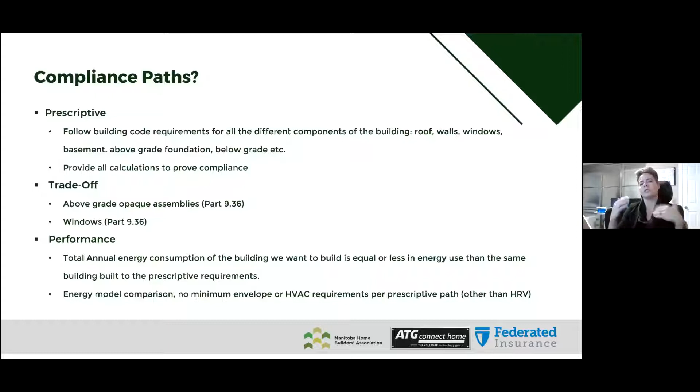What I mean by that is with your proposed house, you could get away in meeting code with building really old insulation values, an R28 attic, R12 walls, and R8 basement. Yeah, in theory, you might just be able to meet code. I'm not saying it's going to sell though, simply because that's not what mainstream builders would do, but it just shows that there's a lot of value engineering that can go into a performance model. So generally speaking, these are the two paths that are most used in code compliance.

So the prescriptive is an all or nothing. You can't do just the attic and the basement, you have to do everything. So all your windows have to comply, your walls have to comply, and then all your HVAC efficiencies have to comply. So it's an all or nothing.

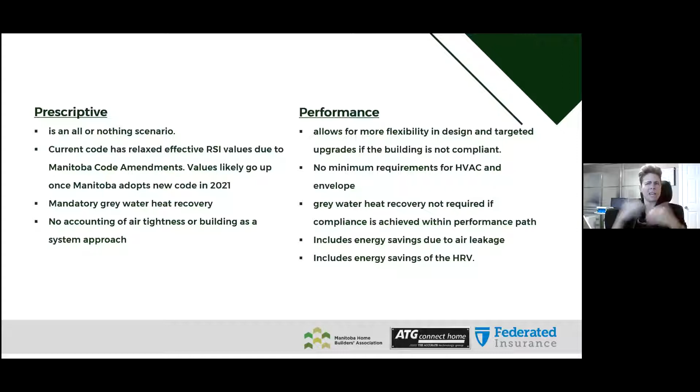The current code in Manitoba has relaxed effective RSI values because of the amendments that were made, but we kind of have to assume that those values will change and more than likely go up as Manitoba adopts the 2021 National Building Code, National Energy Code. Manitoba also requires gray water heat recovery for all prescriptive paths. And as I said earlier, there's no accounting of air tightness or building as a system approach in the prescriptive path.

Now, the performance path, it allows for a lot of flexibility in the design. There is no minimum requirements for HVAC and envelope, again, what market will pay for. Gray water heat recovery is not required in the performance modeling. And we can include energy savings from air tightness and HRVs. So I feel that there's not one size fits all.

You want to be able to play around with both, but really in our experience, what we've seen is the prescriptive path really benefits high performance houses. So when you're going to a passive house or net zero or highly insulated houses, then the prescriptive path is kind of a no-brainer to comply with code. It's easy, it's quick. But if cost is a concern, or, you know, most people want to build houses cost optimized, right? So performance tends to allow us to go in that direction.

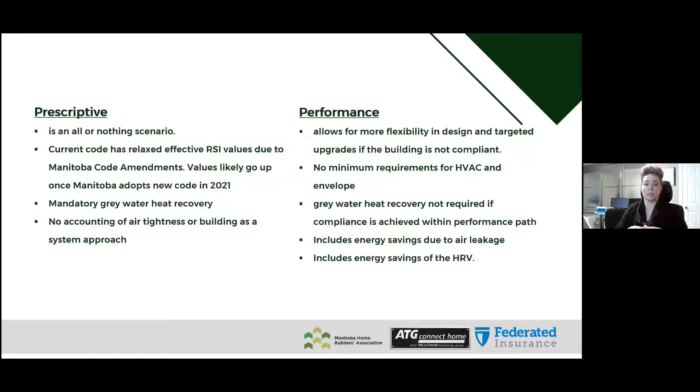Now, making energy conservation part of our building codes is always a good way to push an industry forward. I mean, let's face it, we've been building houses for over a century now. And as far as I'm concerned, we didn't change much. We're still building with wood, we're still building with batt, maybe the attic insulation changed, but we haven't changed really dramatically the way we do things for over a century. And now we're stuck with a challenge that is very, very time aggressive for an industry like ours.

So when we push an industry forward, we have to do it wisely. And we have to integrate the different parts of the codes and not just add them to one another. The reason for that, I'll explain in a minute. So if we don't carefully integrate all the different requirements of the energy codes, we may create more problems than good out of all this.

The building code is currently set in silos. So you have the ventilation piece, you have the thermal piece, you have the structural piece, and all these different parts of the building code don't refer to one another. They're all in silos. And so if we keep on that track and we don't understand how all these sections interact with one another, we may not be able to build houses in our current developments. We might have structural problems. We might have indoor air quality issues and mold growth in our brand new houses and major envelope failures.

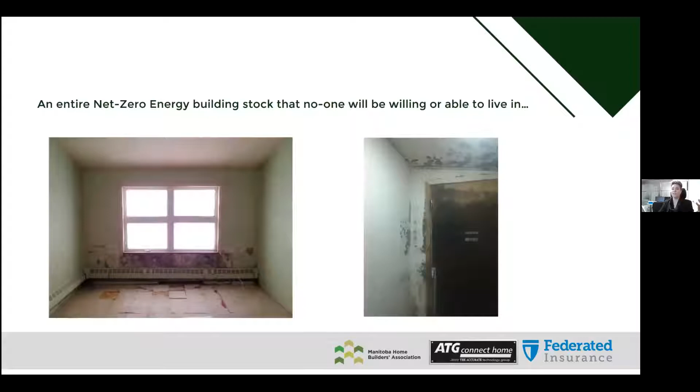So this is what we might end up doing if we don't take this carefully. So adding insulation and only doing that is not a safe way to approach the transition to 2030. If we want to build to 2030 net zero energy ready, we want to make sure that people are going to want to be living in them, and that they will be able to live in them.

And the reason why I separate the two is that, when you look at pictures like these with mold and drywall falling off the walls, I mean, some people that have very, very low income, that might be the only thing they can afford, but ultimately their health is going to kick them out of there. So where do we find that balance?

So how do we make the transition to the Pan-Canadian framework targets of net zero energy ready by 2030 a success? There's a lot of moving parts, and just like any new trade or new expert that comes in construction, that's where performance modeling at the design stage comes in. Currently, the performance path is mainly used as a verification tool to make sure that the houses comply with the different building codes.

When we take this approach to the commercial level, the last code change from 2015 to 2017, I think many larger buildings that were compliant by about 5% in the old version are not compliant anymore. And so now they have to treat the performance modeling as a design tool, and that leads every decision they make. You have to know that when you go to tender, your building will be compliant. Now that hasn't happened yet in residential, but we have to assume that it's coming. So performance modeling at the design stage will become a key component to making this work.

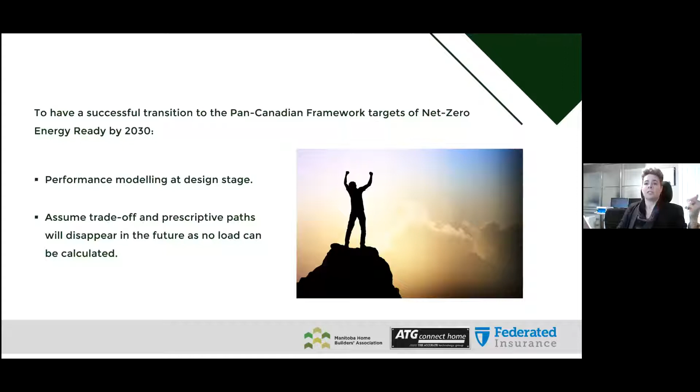The other thing too is because we can't calculate a load, so an energy load, heating, cooling, appliances, electrical load, on a trade-off path or prescriptive path, we have to assume that in the future, those paths will disappear simply because of the target from the Pan-Canadian framework. So how do we get to transition without all the risks? The risks of envelope failure, the risk to occupant comfort and callbacks, and how do we do it more cost effectively?

So here's a nugget I always like to point out. Many homeowners call back builders after occupancy for whatever reason. What I think we're missing here is that most of these callbacks are triggered by some kind of discomfort. Now, homeowners don't know that it's a discomfort issue. All they see is the symptom. Symptom could be, there's cold air coming out of my ductwork. I have ice on my windows. You know, whatever the discomfort is, whether it's visual or thermal or a breeze.

And so they don't know that it's a discomfort trigger, but you get the phone call and now you're trying to troubleshoot something that is very subjective; not everybody feels comfort the same way. So I feel that there's a conversation around comfort. We see it as something that is kind of secondary. But when you really think back at all the calls that you might get after occupancy, you might realize that if we designed for slightly better comfort for the occupants, there's going to be a lot less callbacks. So there's food for thought.

And cost is always a conversation piece. I mean, let's face it, we all want to build a good product. We all want to get to net zero energy ready by 2030, but nobody's in business to go under. We need to make this work for all. We need to make it cost effective. So this is where air tightness and energy modeling becomes your best friend. Now we want to include those two pieces together, for all the reasons that are listed above.

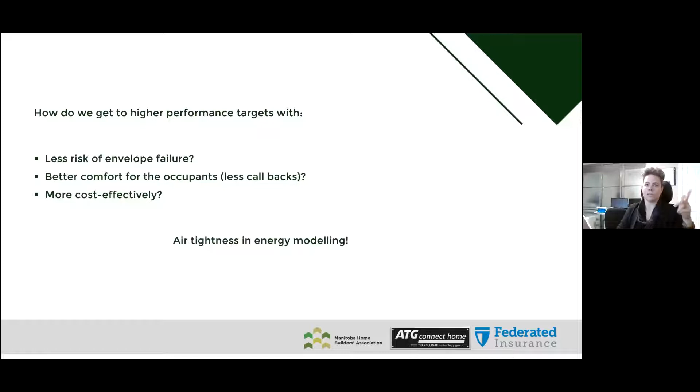So in Manitoba, it's easy because I have been made aware that the builders in Manitoba are already experts at air tightness due to the push of the R-2000 program in your region about 10 years ago.

So kudos, because that's not what we see in Alberta and in BC, okay? Now, just to be fair, the different climates allow for different leniencies, different relaxations. But there's something to be proud of as far as the Manitoban builders in how you can detail the air tightness of your houses. So if you're putting in all this hard work, why not use it to your advantage?

So let's do a quick airtightness recap. As this is more of a monologue, usually this is done and we're kind of interacting all together. I welcome you to just kind of think about the questions I'll be asking, and then we can have a conversation around them at the end of the session.

So really, what's the intention of an air barrier? What is your primary air barrier? There's a few mainstream ones, but it's all up in the air, and you can get really creative. What materials can we use and how do we use them? What are the challenges around air tightness? What are the benefits? Because it's not all just about energy efficiency. There's a lot of other benefits to air tightness. How do we detail it?

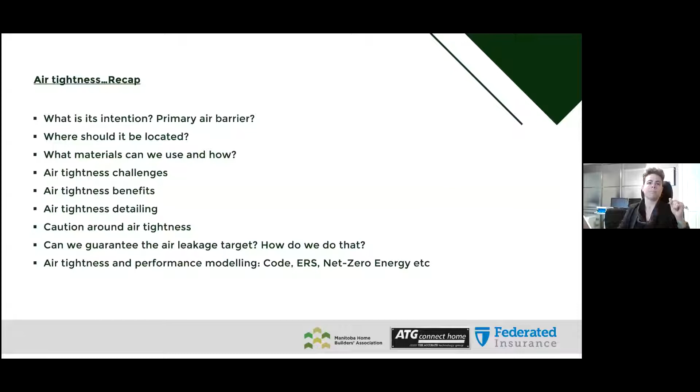So what's the intention of the air barrier system? Well, you probably all know this, but basically it's to reduce the amount of unwanted or uncontrolled leaks through the envelope system of your house. And those leaks are mainly triggered by pressure differentials between inside and outside the house.

So in the prairies, and that's really theoretical, the only time that we would not get any air transfer from inside the house to the outside is if there's zero wind outside and zero wind inside. So if we think about that, it really never happens. So might as well get on the bandwagon and understand how all this works.

So basically, there's three main ways that your house loses air: stack effect, mechanical flue effect, and the window effect. Depending on where your windows are located and when you open them, you can get either cross ventilation, or if they're closed, positive and negative pressure planes. So this is all part of building science 101. I believe there's a lot of courses out there that you can use if MHBA doesn't already have one. I know they have a huge amount of courses that you can tap into.

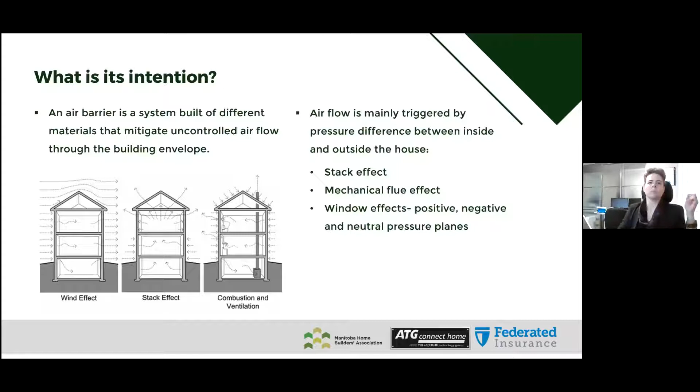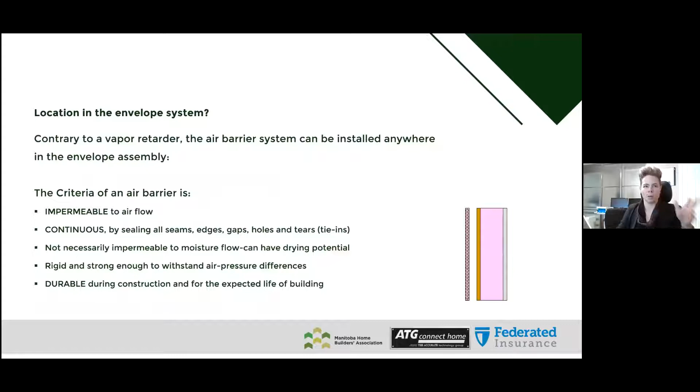Okay, so where does the air barrier system have to be located? Now we're talking air here. We're not talking about vapor retarders or vapor barriers. We're talking about air barriers. So again, air barriers can be located anywhere in your envelope system. It can go in and out. It can go only inside, or only outside, as long as it's one continuous tied-in system. I always like to say that you can't have a half-popped bubble. Either it's whole or it's popped.

So if you have an exterior air barrier, you have to tie it to the inside one at the ceiling level, and then tie that to your windows, down the wall, rim joist, foundation, back down to the slab edge, and then all the penetrations throughout that envelope system.

So the only criteria that we have to be aware of for an air barrier is that it has to be impermeable to airflow. I'll give you an idea what that means in a minute. It has to be continuous, meaning it has to be sealed, caulked, and taped so that it doesn't move and it resists air. You can't have a hole in it. It doesn't have to be vapor tight. It can be airtight, but it doesn't have to be vapor tight.

And that's where some people get confused. And the other thing is it has to be durable during the construction process, because it's great if you put all that detailing in, and then once you're done and all your trades leave, your air barrier is destroyed because it's a construction site.

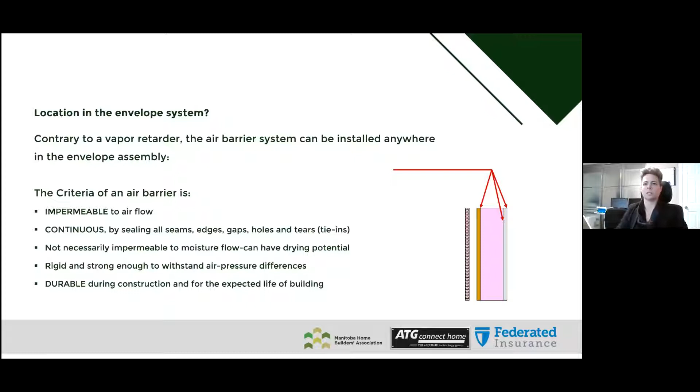So we have to be mindful of those things just to make sure that you're not just wasting your time and money. So what materials can we use? In my nerd world, it's any material that has 0.02 metric perms at 75 pascals of pressure differential. So that's a mouthful. In layman's terms, it's pretty much any material that's not fiberish, right?

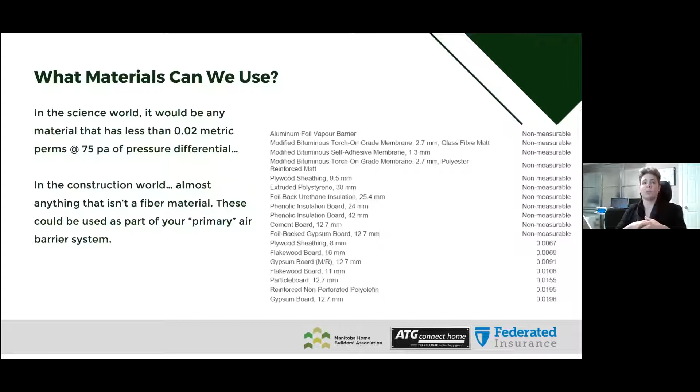So, generally speaking, or grossly speaking, you could just think about this material and hold it up to your face and blow air through it. And if air doesn't go through it, it might be an air barrier. You could use it in an air barrier. So there's a lot of products out there that we can use as an air barrier system. And on the slide, for the ones that can see it, there's a whole list of them. OSB, drywall, poly, polystyrene, anything that's hard really can be part of an airtight system. That would be the primary air barrier.

So what is your primary air barrier system? That is the one or two materials that will cover the greater area of all your components. So in Alberta, a lot of the time it's the polyethylene on the inside of the house. That polyethylene covers the attic, it covers the walls. There's another approach for the rim joist most times. And then the poly can go on the hot side of the frost wall in the basement, and then ties into the slab and even under the slab, right? So the polyethylene in that scenario is the primary air barrier.

Now, to make it airtight, you have to seal it all up, right? So you want to seal it up with whatever you can. So what are the challenges of building an air barrier system? Well, it's not something that's taught in school. I have an architectural tech background, and okay, maybe I date from 2001, maybe the curriculum's changed. I knew where to put detailing for vapor barriers, but I don't recall really getting a full course on air leakage and how that works.

There's a lot of management on site. Air barrier systems are a real team effort, right from the concrete foundation guys to the structure, to the framers and the insulators and drywallers, and then even the finishings. It can be pretty labor intensive, and it can take a lot of time. Not many understand it. They just do what they've been doing for years, and they don't really question if there's a reason for doing things a certain way.

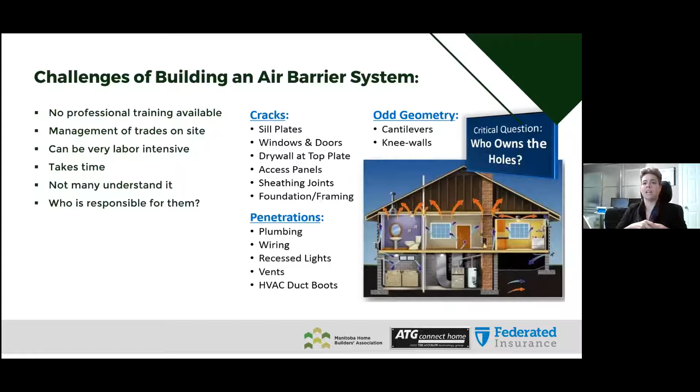And who's responsible for them? We have one of our customers here who's the drywall and insulator guy, and in his contract, he has the airtightness or air barrier liability. That's a huge liability. So that builder actually just rules out all the other trades and puts the entire onus of airtightness on this one trade. So again, to me, that just shows that there's a misunderstanding of how it is a team effort. So there's a lot of little holes in our houses that need to be addressed, and they're not always as easy to detail as we would like them to be.

So what are the benefits of building a performing air barrier? And we'll get into what that means. So for the homeowner and client, we can see operations cost reduction in the lifetime of the building. Now, to be fair, right now the cost analysis for energy savings is not very good because the cost of energy is so low. We can only assume that it's going to go up though. So as soon as you get a homeowner that plans on being in their house for 5 years, there's a chance that energy pricing is going to go up, so the cost benefit of airtightness is going to be a little better.

It allows for better control of indoor air quality and can also promote better indoor air quality. And that's where some groups get confused, like, well, if I'm too airtight, am I not reducing the indoor air quality? Well, again, we'll get into that in a minute. The houses are usually quieter. We don't hear as much of what's going on with our neighbors. I find it really interesting. As I did my master's in Europe, there's this stigma that says, oh, I don't want to live in a row house, or I don't want to live in an apartment because I don't want to hear my neighbors.

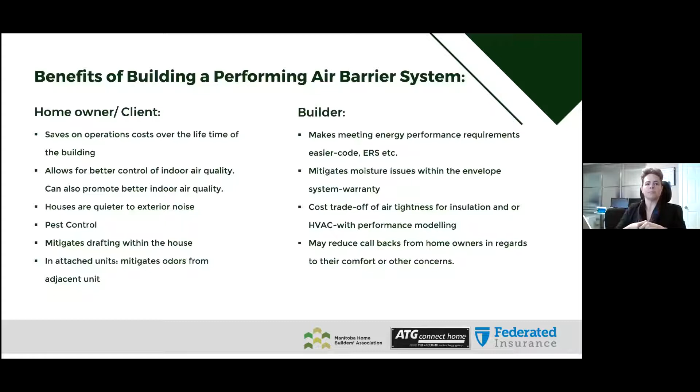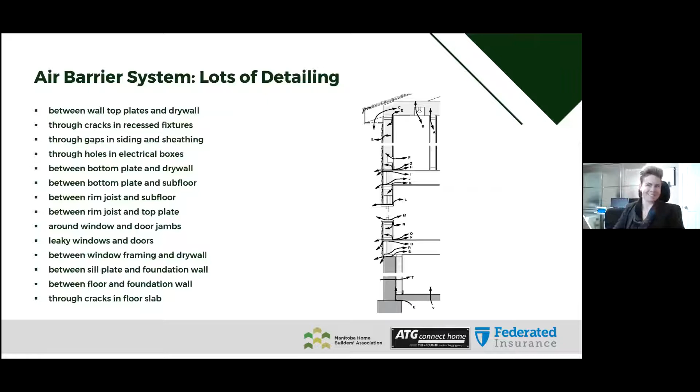So yes, when you have an airtight building, your unit will tend to keep a lot more of its moisture because now the moisture doesn't have anywhere to go. For the longest time, it could just travel through the walls and all the holes in your envelope system, and you'd be just fine, right?

So it could also create a challenge in indoor air quality, simply because some moisture is good, but just like anything, too much is like not enough. So you don't want to have it too high. And if you can't keep the relative humidity in check, then that's when you get condensation on windows and potential mold growth on either a thermal bridge on your walls or at the floor perimeter. We've seen that in the past.

So the typical response is, well, if I'm so airtight, how is my house going to breathe? Well, I'd like us to change the lingo a little bit. The house doesn't have to breathe, quote unquote, it has to dry. So the way I see a house is it really is a lot like a human body. Now, I agree, if we all wrap ourselves up in saran wrap, we're not going to be happy, right? We're all going to be a little suffocating. Now, if I poke a hole and I put a straw in your nose and mouth, you'll feel a little better, but it's not optimal, right?

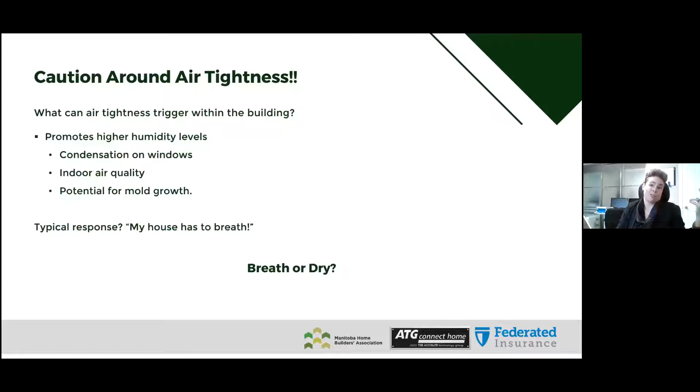So luckily, every single house has a ventilation system to dry it. And they're called windows. Now you're going to say, oh, come on, Em, windows, really? I'm like, well, it's not energy efficient. It's really uncomfortable. You can't control the amount of air that you're going to let through your house. But ultimately, if you're ready to suck up the consequences, you can open up your windows in winter conditions, and you're going to dry your house. Now, it's not optimal. So what would we recommend? Obviously, you all know it. An HRV is the best way to approach this.

Now, again, Manitoba makes heat recovery ventilators mandatory in every construction. Well, that's really good. And I don't know if you ever ask yourself, so why? But basically, because the Manitoban builders are already very well versed on air tightness and they reach really good targets, you have to have proper ventilation. And that is also why the different governments were able to relax the prescriptive values in Manitoba, because they know that the builders do a good job of air tightness. So again, kudos to you.

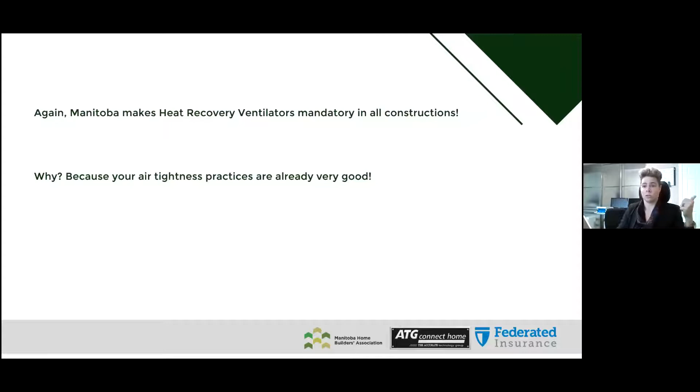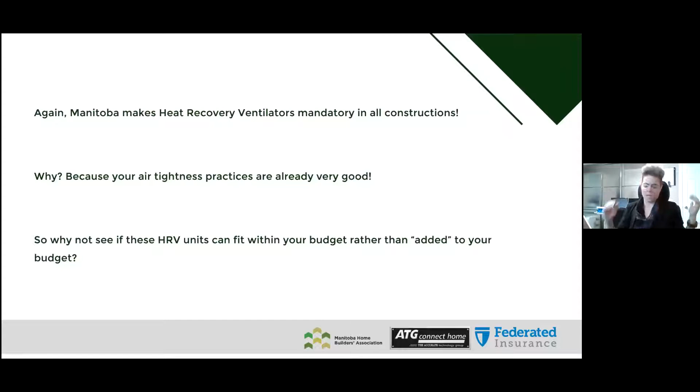Now, those HRV units, yes, we need them and we should be putting them in. An HRV could be anywhere from what, $700 to $1,500? I don't know. Depends on your market, depends on your unit. But is there a way that we could fit the price of that unit in your current budget rather than adding it to your budget? Now, I understand that you probably plan for the expense on your build, but can we make up that money in our pocket? And then you get to choose what you want to do with that extra money, right? I'll leave that up to your business savvy people on your teams.

So, ventilation systems and heat recoveries. As HRV recovers the heat from the exhaust air rather than discard it, it saves energy as it preheats incoming fresh air. Now that's a true statement, it does. But again, because of the way the building code is written, if you do a prescriptive path, you're going to get a little bit more benefit as far as theoretical code compliance than if you're doing a performance. But in the performance path, the reason why we like the HRV is not so much to save the energy, simply because of the ventilation rates we have to use, but mainly for the health and well-being of the occupants.

The HRV allows for some energy savings and code compliance because the reference house does not account for one. So if you put one in your proposed house, then that's a credit that you have over your reference house. But to get the full benefits of the HRV, the install should include a controller. And I know it might sound really odd, like, come on, really? People don't put controllers? Well, no, not everybody does.

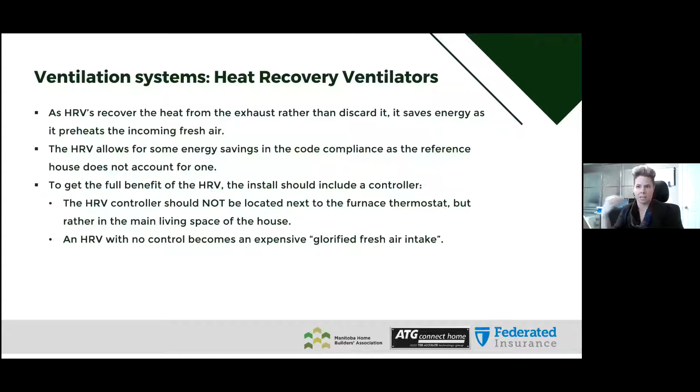So what we've seen here is people get bothered by that and they go downstairs and they unplug the darn thing. They unplug the HRV because the air coming out of the ducts is cold. And then the builder gets a call and says, I got cold air coming in through my ductwork, I don't want that thing working, blah, blah, blah. And so now we get into an airtight building that doesn't have proper ventilation, and then you get all the snowball effect of that. So again, when we design these things, we have to be mindful that we are dealing with living beings and not people that just take decisions on data like the conversation we're having now.

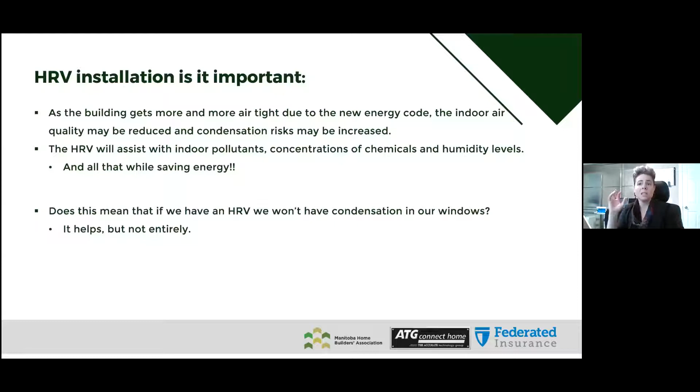So it's important to have a well-installed HRV. As the houses get more airtight due to the energy code, the indoor air quality may be reduced and condensation risks may be increased. The HRV will assist with indoor pollutants, concentration of chemicals and humidity levels, and all that while you save energy. But having an HRV doesn't mean that you rule out completely the risks of condensation on your windows and mold in your house. There are other factors, but proper dryability in your houses is a key factor.

So, air tightness quality control. How do we know if the air barrier was completed properly? How do we know what we paid for? And I think that's a great question, because we have these conversations around what's the best way to build an air barrier, and different trades will just put it in their quote. But how do you know what you paid for? Like, how much money did you really spend figuring out all the detailing that comes with an airtight system? Can you really separate the materials from the labor on this question? And you might find that that differs from one building to another.

I've had some builders tell me that to be at 0.5 to 0.7 on every single house, they had to do 3 trainings every 3 months, and it took them 5 years to get there with their trades. And that means that they can't even have a turnover of trade. And so what were they paying for before they got to 0.7? So I feel that there's a cost question that needs to happen here to really see how much are you spending on your air tightness. How can we find out if your air tightness is done properly? And the lower air exchange rate will bring more benefits to the homeowner. So I'm reading my slide and I'm like, oh, I don't remember what I meant by that.

But in a nutshell, how do we quality assure an air leakage target? Well, an air leakage test is the measuring tool. We can do that at pre-drywall. Again, there's some caveats. You don't want to tear out poly and all that stuff. You want to do it properly and cautiously. Some people will opt for a positive pressure test at pre-drywall with a big smoke machine inside, and then you see the smoke coming out. That could be a safer practice, because now you're not ripping out poly down the walls and ceilings. And we can do an occupancy test. So what we like to do is both, because that's the delta that we have to work with in simulation modeling.

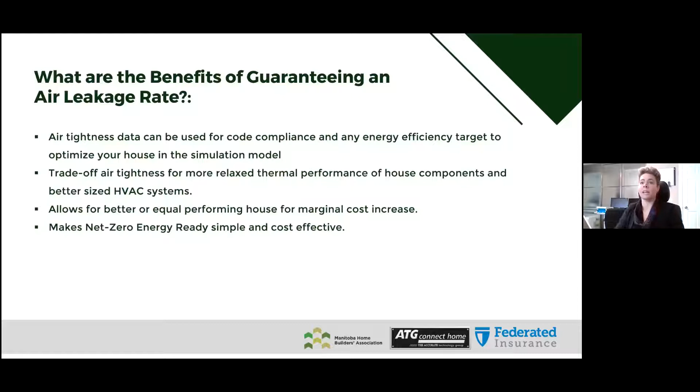It allows for a better performing house at marginal cost increase. Air tightness with or without air barrier is by far the most cost-effective way to get to higher performing buildings. And it makes net zero energy ready simple and cost-effective. So I'm going to give you a quick case study here.

We did a quick cost analysis on including air tightness in an energy model, just for code compliance. Okay. So, full disclosure, this is for single family detached houses. As soon as you throw party walls in, then that's another conversation. The results are the same, but the impact of air tightness is even better. So this is for a single family house, detached, an average size, production builder house.

So most houses today comply to the National Building Code. I'd have to run the numbers to see it more accurately for the Manitoba Code, because the prescriptive values are different than the National Building Code, but I feel that they would be very close. Most houses at 2.5 air changes per hour are about 5% compliant. As you may already know, the code allows us 2 different air leakage rates to model, and that air leakage rate is determined by the amount of detailing on your drawings, on how your air tightness details are put together.

Most houses in Alberta, we have attics, 2x6 walls, 16-inch on center, 4-inch of 2-pound foam in your rim joist, 4-inch of 2-pound foam in your cantilevers, 2x4 basements at 24-inch on center, no slab insulation below frost line, no radiant slab. Like, yes, we do have some, but let's go for a typical build. 96% furnace, HRV, a typical natural gas hot water tank, double pane, vinyl frame windows, and approximately 13% fenestration and door to wall ratio. So we're not looking at mansions that are facing west, with full tall walls and walkout basement.

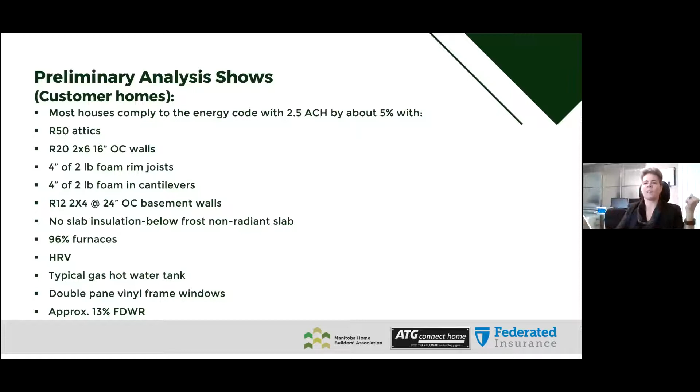Just a typical build. The same specs that I just described, if we take the air leakage rate from 2.5 to 1.5 air changes per hour, so we're pretty conservative here, we went from 5% compliant to 20% compliant. So what does that mean to you as a builder?

Well, as the energy codes get more stringent, if the air leakage is fairly low, the construction assemblies won't have to change as quickly. So basically, your air tightness allows you to buy time to adjust as either the prescriptive values are going to start rising, or the performance path is going to get a percentage of betterness that will increase over time. You might not have to start looking at more difficult envelope systems or assemblies for a little bit longer, because air tightness will keep the performance of your house to a certain level with conventional practices.

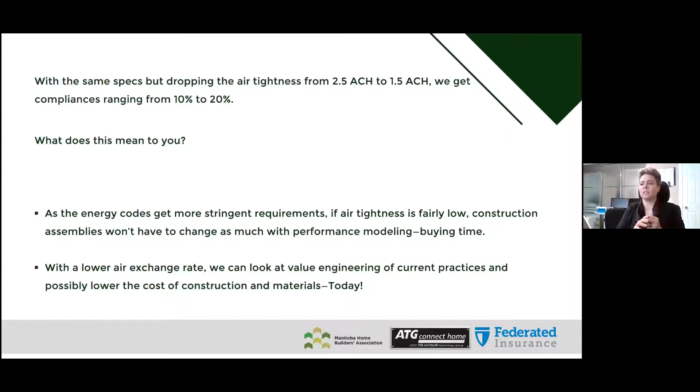And a lower air leakage rate will offer you an opportunity to value engineer the current practices and keep the construction cost and materials down today. So again, it's not about building cheaper. It's about building smarter, doing it better. So the moral of the story is, if Manitoba builders are already very good at air barrier systems and are mandated by codes to install HRVs, why not use this to your advantage in the performance modeling, which is also known as a full building trade-off.

So people are going to say, but Em, when we do energy performance, the specs are going to change on every house. And as a production builder, I can't have that happen. I said, well, that's not really how it works. And so what we do is we would model and figure out a spec that would work for 80–85% of all your builds.

And the odd time that spec doesn't quite cut it, then we would find a solution that's cost effective to make that one house slightly different. And we're not talking about adding exterior insulation and heat pumps and all. Usually there's small things that we can change just to tip you over that compliance threshold.

So basically, instead of increasing your cost on every single house with a prescriptive path by compounding efforts, now you develop a spec that gets you there on most of them. And then on the one house that might not get there, that's where you spend a little bit of money. So when you do your budgeting on a yearly basis for all your building stock, you're not adding cost to every build, you're adding cost of one house over all your builds. So from a business perspective, you kind of dilute that extra cost.

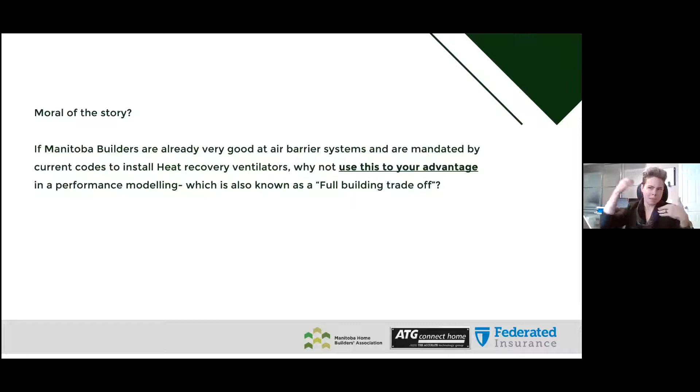So you can optimize. I don't know if you saw, is it Moneyball with Brad Pitt? That's kind of what he did with his baseball team. He took every player and optimized which player would play in which position. They weren't always the highest paid player, but they were optimized in their plays, and he got a winning team out of it. So again, those are the kinds of things we have to think about when we start moving forward to the 2030 targets.

So in summary, guaranteed air tightness makes meeting energy performance requirements easier, whether that's a building code or net zero, it doesn't matter. And you can guarantee it by using technology, or you can guarantee it, or very close to, with a lot of site support. Either is fine. Ultimately, you just want to really hunker down and know that you will get to whatever target you set. It mitigates moisture issues within the envelope system, from what I understand from our warranty partners here in Alberta.

Attic rain, it's really funny. I don't know if you ever typed attic rain on Facebook or on social media, but there's a lot of talk about it. I don't know if you had a lot of that in Manitoba, but in Calgary for the last couple of years, it's been pretty bad because of our Chinook winds. So yeah, everybody's scared of it. Anyways, I get a bit of a chuckle out of it.

Cost trade-off for air tightness for insulation and HVAC performance. So just like I mentioned, if you know the air leakage rate that you can achieve, now all of a sudden you can revisit the insulation you're using, the sizing of your HVAC, the distribution system of your HVAC. And by doing all that, you can offer more benefits to the homeowner, more benefits to yourselves as a builder, so you reduce your liability, but for the same cost or very close to. So again, build smarter and not harder.

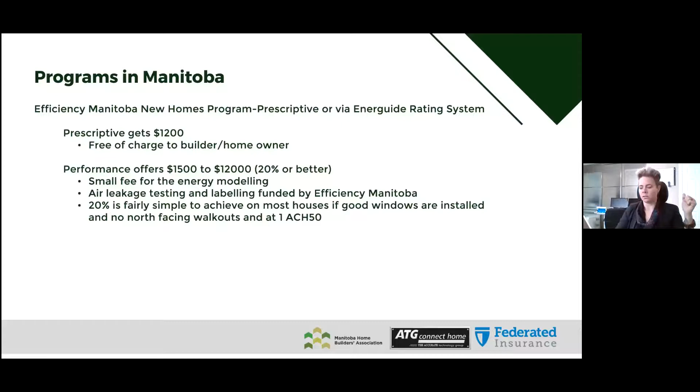CMHC mortgage insurance also applies. You can apply for single family or MURBs. That's built on the backbone of EnerGuide or code compliance. So depending on how you want to submit your application, it's either a code analysis or an EnerGuide analysis. So if you have questions about that, I welcome you to reach out to CMHC. They have people in every region supporting markets to explain those different programs. But basically, if you use only the EnerGuide scale, you can get 15% on insurance premium refund to the homeowner. If you get to 40% better, then you get 25% back. I remember that when I bought my house 10 years ago in Edmonton, we complied with the 15% better, and I got about a $4,000 check.

So, to the home builder, it might not be a lot of money, but to the homeowner, $4,000 in the mail is kind of nice. So we were quite happy about it. So these are the main programs that are available in Manitoba. I'm not aware of others. Again, Lanny, if there are others, please let the group know.